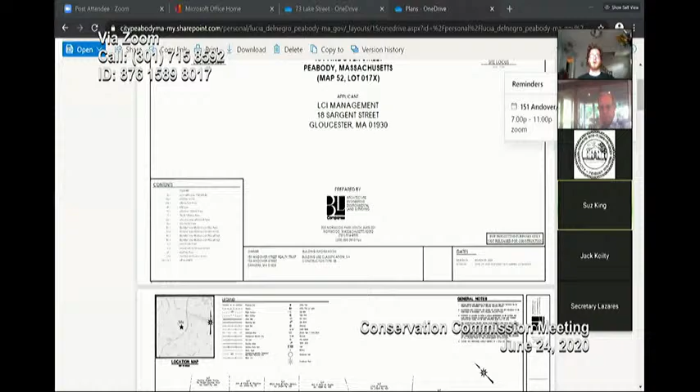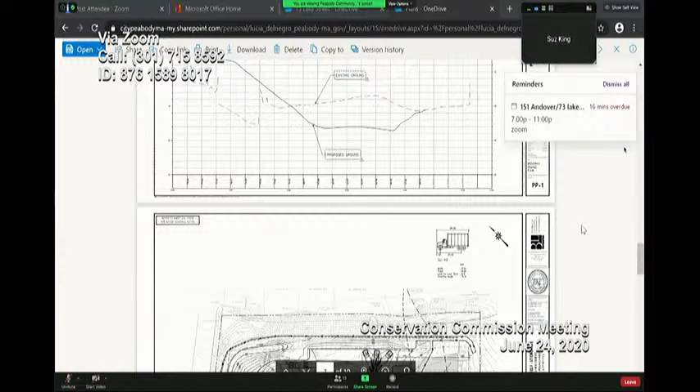So we now have approvals from the other boards, or conditional approvals from the other boards. And so now we have our final design, pending comments from you. Lucia, if you can bring up, I think probably the grading plan, GD-1. So it's sheet 8 of 10 would be the best sheet. A couple more. This property is 151 Andover Street. It's the old Borders bookstore across from the mall there. And there is the off-ramp for 128 off to the south there.

Between the off-ramp and the site, there's a concrete drainage ditch for the highway drainage area. And then just off the eastern corner, up in the upper right-hand corner, there is a wetland that's off-site. However, the buffer area comes into the corner of our site. And then the 200-foot drainage ditch buffer is also along the page right side of our site. In general, what we're doing with the project is the existing building is going to remain, and there's going to be an addition that comes off the building. It's going to maintain that roof line.

But at the bottom of the page, where you enter in the bottom left-hand corner, is the office area. That is going to be 1 story above the back area, so page north on the page. And so what's happening is the driveway, we're going to shift from the middle where it currently is to an existing curb cut closer to Loris Road. And then the driveway is going to slope down to the back.

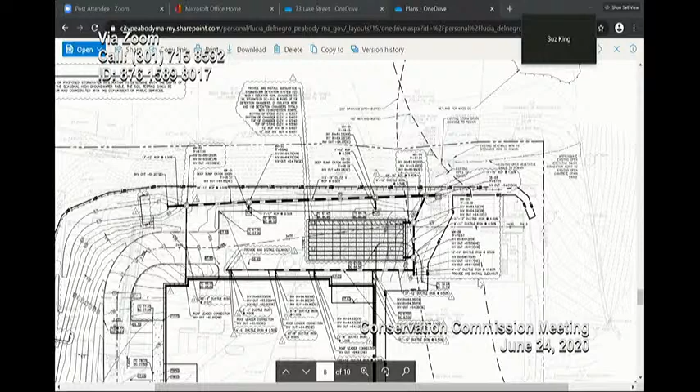And so on site, we are replacing shallow catch basins that are filled with sediment right now. And so we're putting in deep sump catch basins with the hoods. They're all offline. And then the planning board has requested that we have the roof water go through the infiltration system. And so that's why the infiltration chamber is shown right there. We are decreasing the overall impervious area of the site. However, they wanted us to infiltrate the roof water prior to discharging it to improve the water quality leaving the site a little bit more.

And so as far as improvements that are within the wetland buffer, it is just the erosion control measures. The fiber logs, the coir logs are going to be installed along that back perimeter. But otherwise, the pavement that is existing within the wetland buffer is to remain, and all of the disturbance is outside of the wetland buffer. There's some drainage structures and piping and pavement and grading within the 200-foot drainage ditch buffer, but all of the disturbance is outside the wetland buffer. I think that's a lot of information to start with. Why don't I pause and let me know if anybody has questions right now.

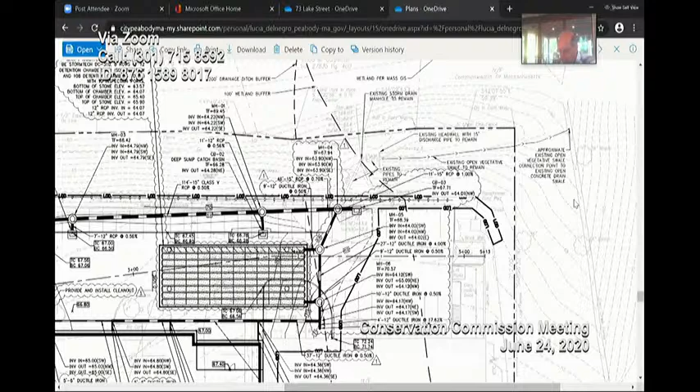Okay, there's a couple things I wanted to just bring out, a couple of questions. So we have a letter from Department of Public Services, but in addition, there were some comments relative to snow storage. Snow storage is proposed within the jurisdiction of the Conservation Commission. Straw bales without silt fence and fiber rolls. Some of the details we wanted to bring up to a better standard, such as on EC3, there's different types of erosion controls. So straw bales without a silt fence and fiber rolls, would the commission have a preference? You see a silt fence, perhaps, added to the details.

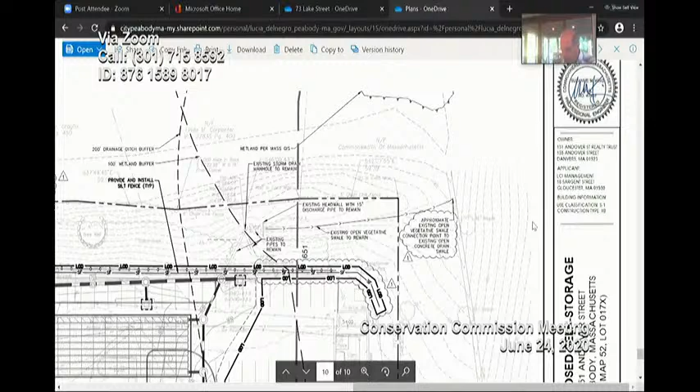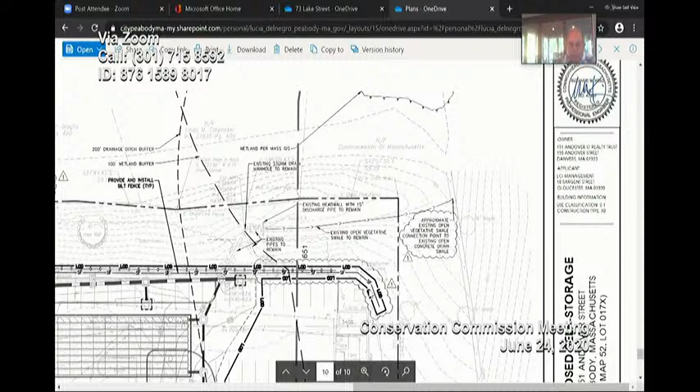And there are 2 dewatering details shown on the revised plans. Revised plans show the dewatering area outside the commission's jurisdiction. Is that so? Do you know if the dewatering system is outside the jurisdiction? So, sorry, was that directed to me? Okay, I think it was. I thought I was over. Yes, it is, Susan. Okay.

So yes, as we are constructing the building, there's a lower parking lot that we will be removing and grading that area. And so we would be putting the stockpiles and the dewatering areas over on that side of the site. Okay, now, normally we like to see the BMPs in place for the site when possible prior to doing the building work. But the site is rather tight because you have to construct a driveway, you got to fill to create the driveway. I think you're filling probably in a couple spots maybe 7 or 8 feet. And then there's the detention area, there's the swale and so forth.

How do you propose doing that? What's getting the site ready before you start the building? We'd like to see these BMPs in place as soon as possible. Not just the outer perimeter stuff, but... So to start the site, obviously the perimeter staked fiber rolls are going to be on the perimeter of the site and can remain throughout construction. As things begin, the existing system will have the protective catch basin inserts.

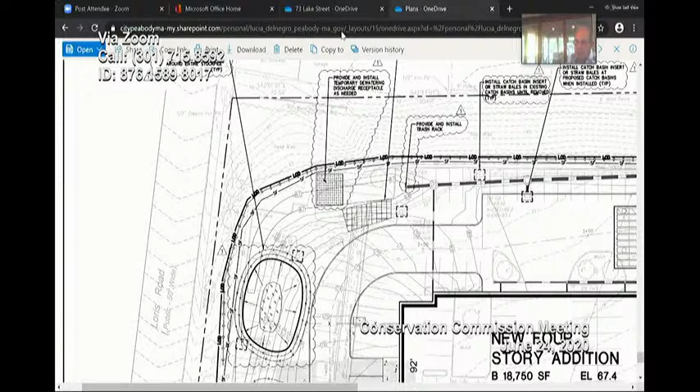Okay. We have a letter from Public Services dated May 20th, and there's a few things that were important. Some of them are building related, such as backflow preventers for the domestic and fire protection, and some water work. So I'm assuming you've talked to Public Services about that. Has this been?

Correct. Yes, we'll have the backflow preventers. They'll be within the building, where the services come into the building, and that will be part of and verified in the building permit review. Are we showing where the water services are coming in?

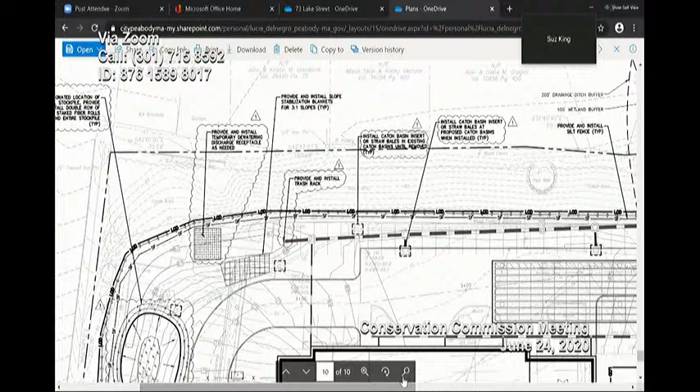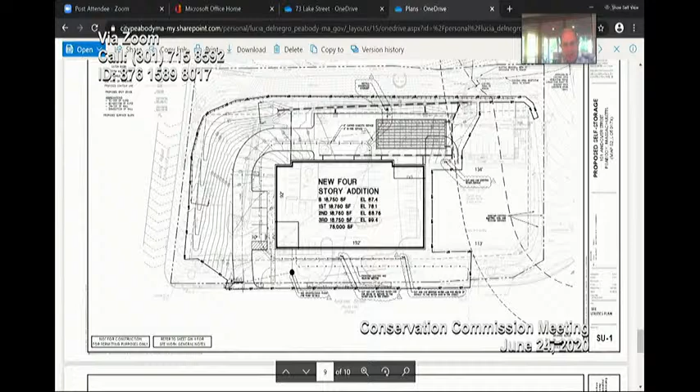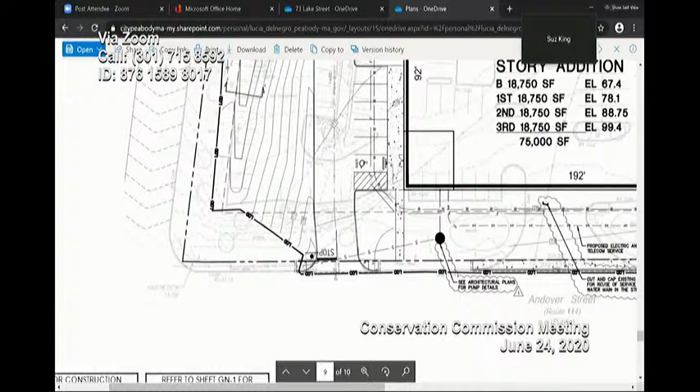Yes. If you go to one sheet above that, they're coming off of Andover Street right there. We're using the existing connections. The two water services come in about the midpoint of the site. So is this on the plans we're looking at now, or does it need to be added? No, that's on. Oh, you're just verifying it's there, yes. Okay. Yeah, we actually show the cut and cap. Okay, yeah, I can see it now. Yeah, here it is.

So on the DPW letter, items number 4, 5, 6, 7, and 8 are primarily relative to sewer and water. Items 9, 10, 11, and 12 are of more concern to us. Item number 9: the applicant's land development plans, revised in April, and the stormwater report, revised at the end of April, do not appear in agreement. The applicant's engineer shall continue to work with the department on the design of their stormwater system. Correct, and we coordinated on that. Okay.

Item number 10, did you do soil testing? No, we would do that prior to building permit. Okay. Item number 11, the 12-inch RCP pipe shall have a trash rack. I think I saw that in the plans. Yes, that is on the plans. And the applicant shall have the remaining drainage pipe inspected. Did you already TV that? No, we're getting our site permits and then prior to building permit.

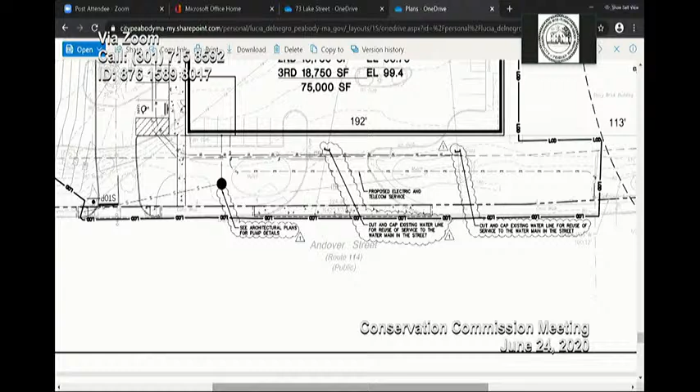Would anybody in the commission like to raise any questions, or Lucia? I definitely have things to say, but I would like to hear from the commission first. Mr. Chairman, I have no comments on this at this time. Okay.

Bruce? My only comment is, if I remember correctly, at the last meeting, which was a while ago, someone was talking about the fact that after it comes out of the Cultec system, it was going to go into an old piping to the existing piping, and I thought they were talking about rebuilding that piece. And it shows on this, it doesn't show outside the limit of work, but yeah.

I think maybe that's why they're gonna TV that. Maybe they're gonna see what the condition of that might be, whether it could be retained or whether it needs to be replaced. Is that the reason for the TV in that pipe? Correct. That was the intent of comments from DPW and planning. All right. I just remember that was a comment that you guys made, that you didn't know how those pipes were. And I thought you were gonna replace them, but it doesn't show it on the plan, that's all.

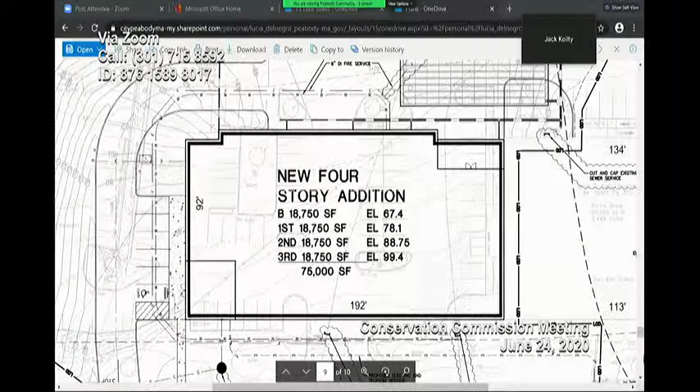Which plan is that? PT1, you said? Yep, I can share it. Let me find it. SP1? Yes. PD or PT? SP1? Hold on. I thought I wrote PP. I'm all over the place today. I thought it was this. They're right next to each other. Here, it's PP1. Oh, all right. So same thing.

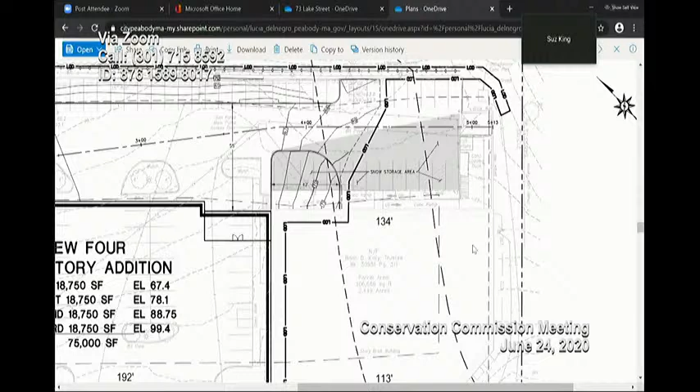So it's in the 200 foot and the buffer, the 100 foot, and so as it melts, it would go across the page into the stormwater system. It looks like that's all your parking though. So what are you guys gonna do during the winter?

So we don't need very much parking. Typically there's only one or a few customers that are accessing their storage facilities at a time. However, if there are, let's say, 3 trucks and we need another area to turn around in the back, that's what we're maintaining that for. So let's say it's the winter from, it seems like yesterday, but I guess it has been a few years now, where there's storm after storm after storm, and we are using that whole area.

We would just have to make sure that as the clients are coming into the back area, they are parking more efficiently than just wherever they need, because it's not striped back there. Trucks are allowed, or your passenger vehicle. And when I say trucks, it's like the smaller U-Haul. So your vehicles would just pull in or park against the building as needed.

However, if this area isn't able to be used for that additional turnaround area, one of the employees may just need to help make sure that people are parking efficiently back there so that everybody can get out. Typically, it's not an issue because less than half a dozen people tend to access their storage areas at a time. It's a very low volume site.

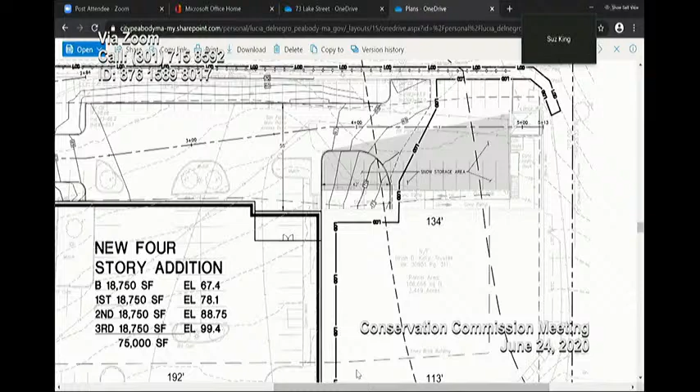I agree. Yeah, that's fine. But again, I don't want to see the fiber roll. I'd like to see a silt sock. Silt sock. Like a compost log, filled with compost, and it has a biodegradable covering on it. Correct. So Suzanne, would you guys be willing to revise the detail sheet? So right now we are showing the compost filter socks, not the straw wattles, but if that's a condition, we can add the silt fence behind the filter socks.

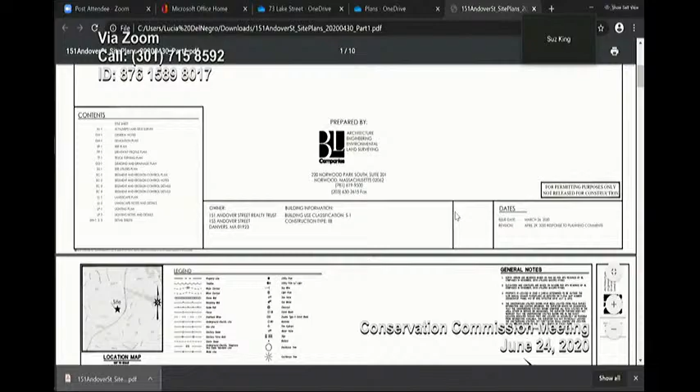Do you know what page? I think it might be on a different one, I just want to pull that up. EC3. Hold on. Keep going about 3 more. This one, part 2? It could be, yes. I had to email it to you. Sorry, I'm not sure what's going on. I'm not great with this. We're all learning. I think it's EC3. Now it's making me re-download it. When I emailed it to Lucia, I had to separate it, so I believe it is in your part 2. It's on the detail page. Give me a second. Okay, you want to open up part 2? All right, here we go. One sheet, yes, there we go.

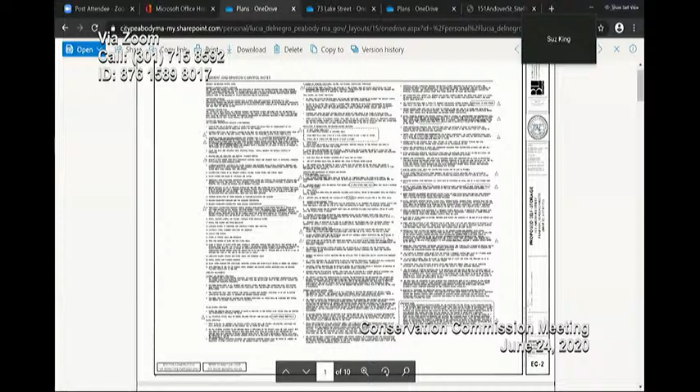So there's your filter sock, and we can add the silt fence behind it. Okay, that's also what I want. One of my conditions was going to be that no plastic meshing would be allowed, because otherwise they always end up just on site. Is that a condition that the commission would support? It says right on there biodegradable filter socks, but I also like to put it in a condition so I can remember that's what you guys asked for. Right, but again, hers says fiber roll, and I want a silt sock. It's different. Not a big deal. I don't think anybody's gonna have a problem with it.

What's the difference though? A lot of people will even call this a straw wattle, the logs that are filled with straw. Right. So you want like the Filtrexx filter. It's a silt sock, just what Lucia said. It has compost in it. It's just a little detail, not a big deal, we can change that. But you want the double, the silt sock with a silt fence. That should take care of it. I don't think anything will get past that.

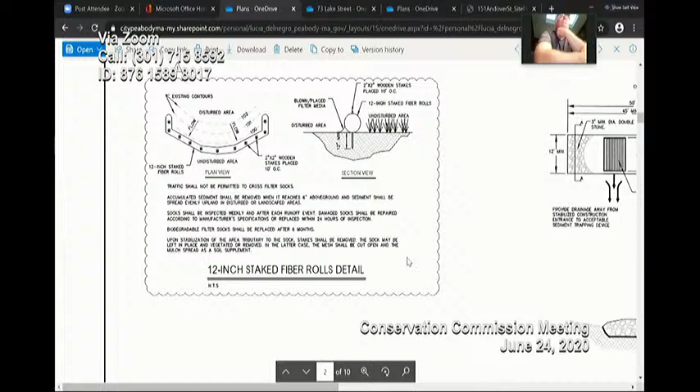And then one thing, because this is such a large project, I think we do need to have wording 10 to 15 feet apart, temporary signs that say no work beyond this point, and they should remain in good condition until the work is finished and the erosion controls are removed. Agreed. Yeah. Agreed. I also agree with that, the condition of no plastic meshing. Susan and Jack, do you?

So there's two things happening right there. With the silt sock, I think we're good on that. The other with the signs every 10 feet, there's a portion of the buffer that goes through pavement. So are you okay, do you want just a temporary sign along there? Yeah, if somehow it can get staked, like clip it to the actual stakes. I mean, I don't know if you're gonna have stakes actually on the concrete. That's not really making any sense.

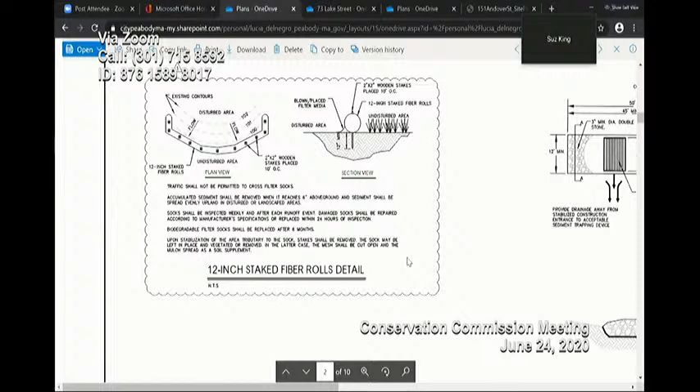Oh, I'm sorry. You mean along the sediment barrier? Yes, just so people know not to go beyond that. I mean, I don't care if they have lunch over there. Some other people might care, but just so you know, don't move that log. Yep, that's fine. So I'm a little all over the place, so we're okay with the detail sheet then, if everyone.

Now, there are 2 dewatering details shown on the plan. Right now it's shown outside the ConCom's jurisdiction, but most likely that water is going to end up in the ConCom's jurisdiction. So Will and I chatted about this earlier, and one of his memo items was number 19, that the commission should be aware of which type before the dewatering happens. I know you said that you're not planning on dewatering, but we still ask for the dewatering detail. So I also think that the dewatering method should be a condition, just so that I'm kept in the loop.

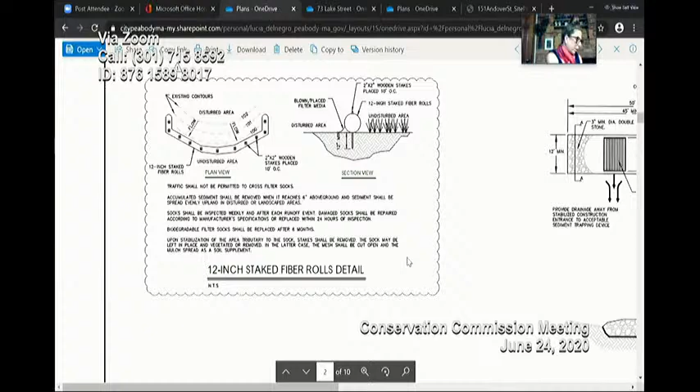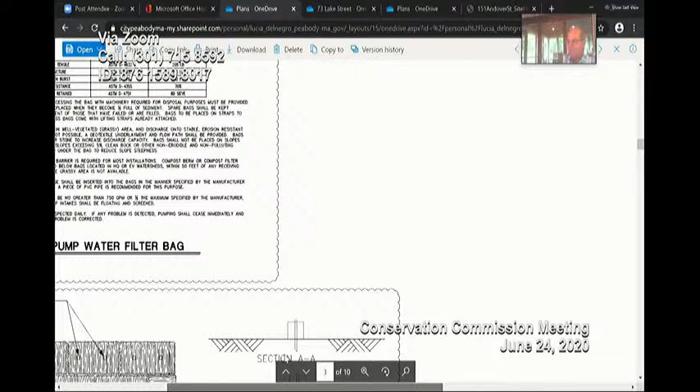Because sometimes the dirt bags or the filter socks can burst. So you want to make sure you have a few of them on hand, maybe you do have that straw wattle basin, so you have both of them just in case. I would just like to know if they're dewatering in case something does happen. And then they have a dewatering detail in the plans. I think it's on sheet EC4. And in that detail, they've got hay bales creating the perimeter of where the filtration would take place. And that filter bag would be inside that, is that correct?

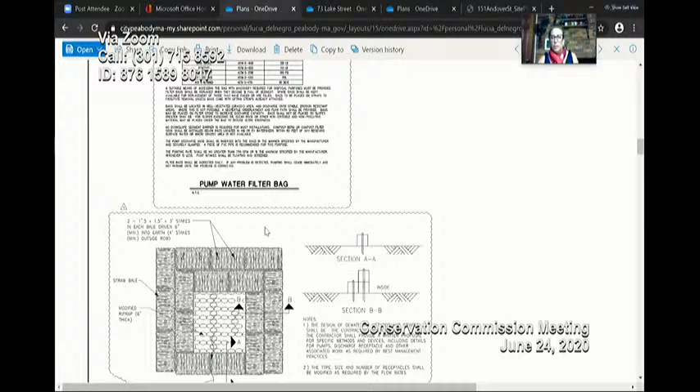So this is what you're talking about, right? Yeah. Well, I hope they're not hay bales, because we don't allow them. They need to be straw bales. It looks like they're showing hay bales in the detail, but oh, it's a straw bale. Straw. So Susan, would the filter bags be in here, or are these just 2 types that you are considering? So these are 2 types that could be implemented. However, if there's a preferred one, or if you want it inside, we can talk about what's necessary.

Well, certainly the season where this work would take place would indicate whether or not they're even necessary. It's been very dry. We're in desperate need of rain. It's pretty dry now, so I don't know if they would be necessary, but if this work was happening in the spring, late fall, early winter, there's a possibility of the need for them. So we don't need to decide tonight. If it's okay, we can just put it as a condition that the dewatering method needs to get approved by conservation staff before. Yeah. I highly doubt they're gonna need it, but who knows? Okay.

We already talked about that one. So just to go back, the 3 conditions. Obviously you have to open it to members of the public before you close it. But my conditions would be, as we already said, we need a revised erosion control detail sheet showing a silt fence behind the compost log with the signs saying no work beyond this point. They can just be temporary, 10 to 15 feet apart, maybe even 20 feet. The O&M is in perpetuity. No plastic meshing shall be allowed on the fiber rolls.

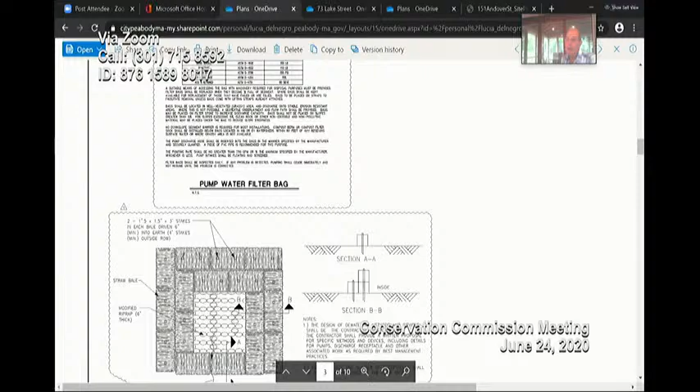I'm sure all of these things don't necessarily need to be met, but I think he would like them in the works before we go ahead and give our signed paper over. Okay, so that is up to you guys if you want to vote that way. Those are my conditions. I think that's 4 conditions. And then that contingency on DPS if you are so willing. Okay. Any other comments from the commission? I'm good. I'm all set.

Okay, at this time, I'll ask Lucia to invite anybody from the public who wishes to raise their hand and ask questions. It doesn't look like anyone is raising their hand. Okay, if I see there's no questions from the public, do I have a motion to close the public hearing? So moved. Do I have a second? Yes. We do a roll call? Yep. Chairman Rizzo, yes. Vice Chairman Comack, yes. Secretary Lazares, he's not here. Commissioner Wojcik, yes. Commissioner Vivaldi.

Yeah, I said yes. Oh, there's Stu. That's me, I just didn't put my picture up. Okay, good, Stu is there. I was worried about you, Stu. Hi, Stu. I came in late because I'm still having trouble with the computer. But I'm here. I listened to all that.

It's fine. Okay, so it looks like it passes unanimously. And Suzanne and Jack, are you okay with the contingent motion that hasn't been made yet? Yes. Okay. So at this time, I entertain a motion to issue an order of conditions, or a negative determination? A negative determination.

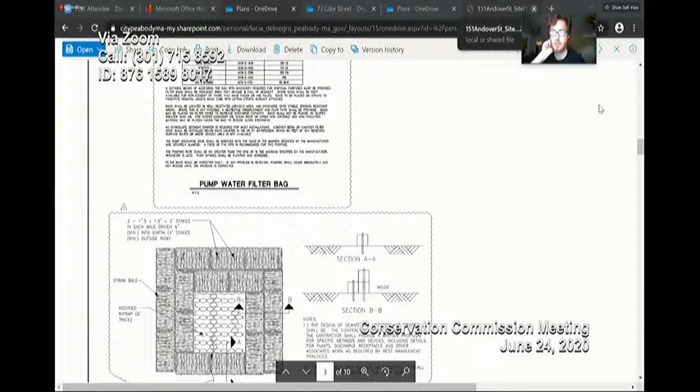Anybody else? Chairman Rizzo, I've actually got a few questions for the applicant. I actually missed the February meeting where we discussed this. But the purpose for this amendment is to increase the size of the garage, is that correct? I think the footprint of the house might have changed also. Yeah, both have changed, correct. Okay. And how many more cars do you plan on storing on this property? What do you mean, additional cars? Right. Well, it's going to have basically a 4-car garage.

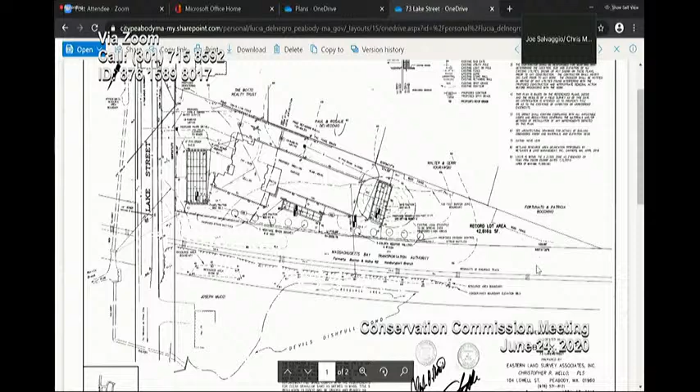Okay. And then, I mean, are you going to be doing any work on the cars at the house? No, absolutely not. It's not allowed. I have a business already where I do work on cars, so nothing will be done at this house. Great. Okay. Yeah, then in that case, I have no further questions. Thank you.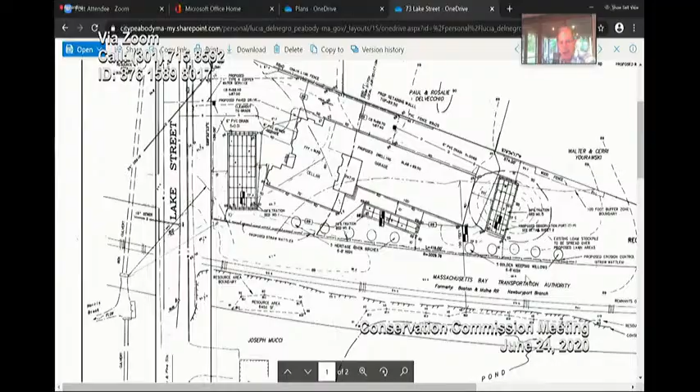Anybody else? All right. Seeing that there's no other questions from the commission, I would ask Lucia to open up the meeting to anybody who's here to speak. Keep in mind, this is an unusual format and forum. And we've had several meetings already, so I know a lot of the abutters have spoken about this project in different ways in the past, and maybe try not to repeat the same things over again. If somebody brings something up, not to repeat it again. So Lucia, you can open it up to any questions from any of the abutters.

I think, Patty, did you just say you lost sound? I'm gonna mute that for now. Patty, we can hear you. I just muted you. I'm gonna unmute you again. Sorry, it takes a while to unmute. Okay. Patty, can you hear us? No sound. So, Chairman Rizzo, we have an abutter that cannot participate, so I don't know what to do. I don't either. Patty, can you try logging off and logging back in?